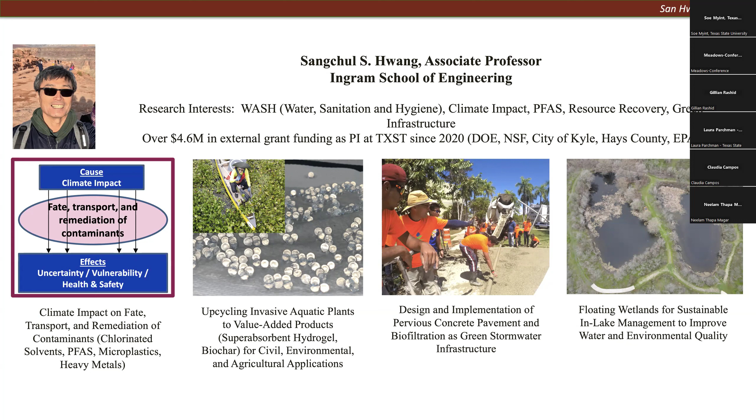So these four areas are actually my research thrust areas. One, I'm an environmental engineer, so I do a lot of fate and transport and remediation of contaminants, climate impacted, right? Because everything is uncertain, and community health and environmental health and safety are vulnerable, nothing we can guarantee these days. Again, especially I have interest in PFAS and micro nanoplastics, and those legacy contaminants, chlorinated solvents and heavy metals.

As I mentioned, I do a lot of upcycling of waste or unwanted material. In this case, upcycling invasive aquatic plants. You see a lot of water hyacinths in the San Marcos River, right? And then I process it to produce value-added products like superabsorbent hydrogel, or biochar. So I apply them for civil, environmental, and agricultural purposes.

And then the third one is actually today's topic, isn't it? Pervious concrete pavement and biofiltration as green stormwater infrastructure. And I actually train students and have them gain hands-on experience on these topics. You see here a lot of students here, right?

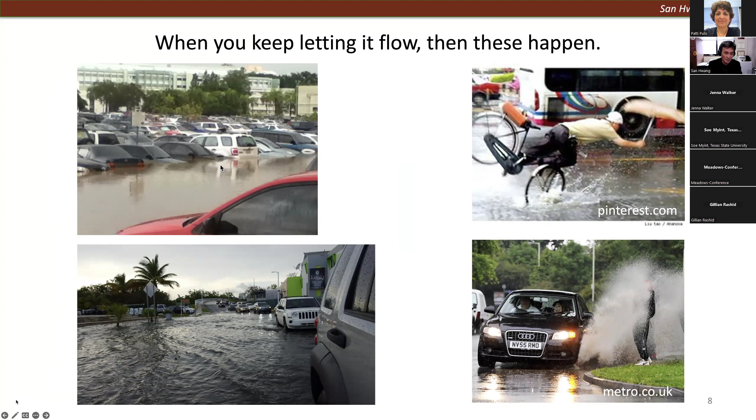So let it flow, let it flow, let it flow. If you keep doing it, this is gonna happen: flooding, flash flooding, right? This is actually a previous institution I worked in Puerto Rico, and the city, not only there, and in Texas, you guys think about, right? So we have Thanksgiving flooding in San Marcos 2015 as well.

So, well, talking about runoff coefficient C, okay? This ratio, meaning when rain is coming to that specific area, 75 or 85% is flushing off. That is runoff coefficient, right? This is impervious surface like ordinary concrete pavement or asphalt pavement.

Runoff coefficient is about 0.75, 0.85. Compared to that, if it is a pervious concrete system or a permeable concrete system, runoff coefficient C value is very, very low, if not zero. So with all that, we can reduce flooding in the downstream.

And I will show you one by one, but anyway, we can have a smaller downstream stormwater management. We can have a smaller retention or bioretention facility so that we can increase land utilization. With all that, we can reduce hydraulic force, isn't it?

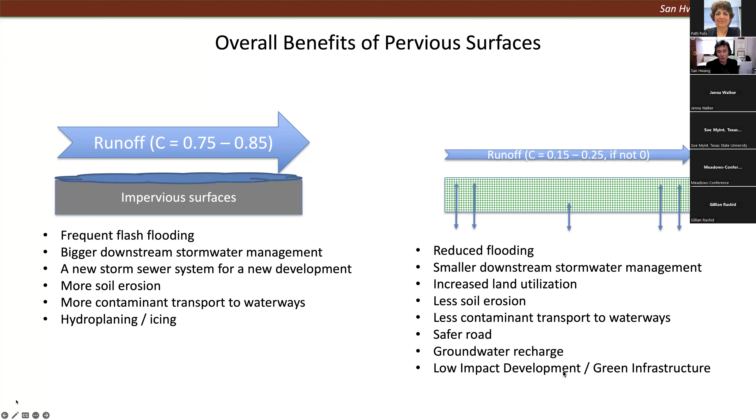So this pervious pavement is a low impact development tool and green infrastructure as well.

So now everybody is fully awake, right? So this is pervious concrete, and it is actually stormwater runoff control. It is a water conservation harvesting tool and smart land development and safer walkable pavement. And also it is reducing urban heat island effect. So I'm gonna explain just one by one from now on.

Next slide has also a video, so please be careful.

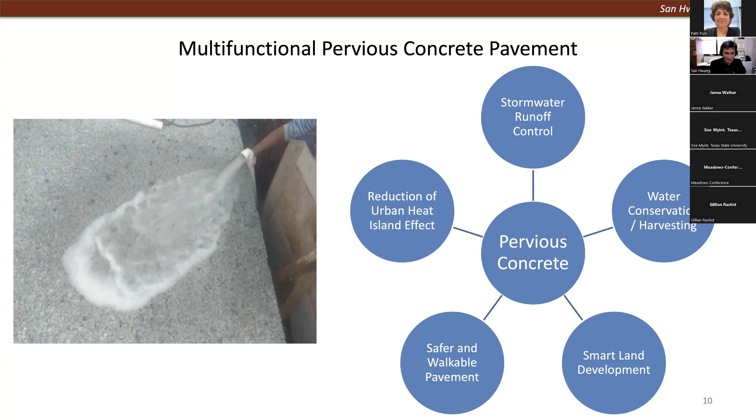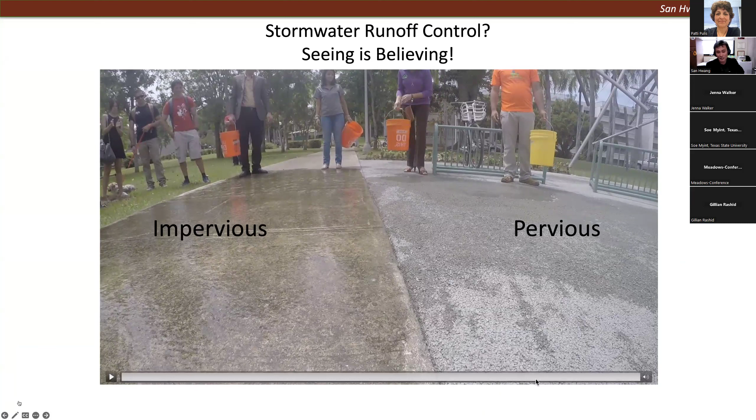Okay, so this is not so bad. This is just comparing impervious pavement and pervious pavement. Seeing is believing, so this is what I would like to talk about. If you have a pervious system, you have less runoff, and then downstream you have less impact. So it's low impact, isn't it?

The reason pervious pavement can catch and infiltrate water is because it has a void content, emptiness, simply speaking, about 20%-ish. Because of that emptiness, it is actually lighter. Long ago, around 1910, in England, when British guys made pervious concrete, they called it lightweight concrete because of the emptiness, its density is lighter compared to ordinary concrete.

Because of that 20% void content, we can expect the drainage rate about this much. This video is showing about 10 millimeters per second infiltration rate. Depending on discipline, it can be called drainage rate, infiltration rate, permeability, or something like that.

Because of this emptiness, compressive strength is a little bit weaker than ordinary concrete. In my lab and field application, I was able to make 20 megapascals, which is about 3,000 PSI. In order to be used as roadway pavement under typical traffic conditions, compressive strength should be greater than 3,000 PSI, preferably 4,000 PSI. So typical pervious concrete is not good for roadway pavement because its compressive strength is low.

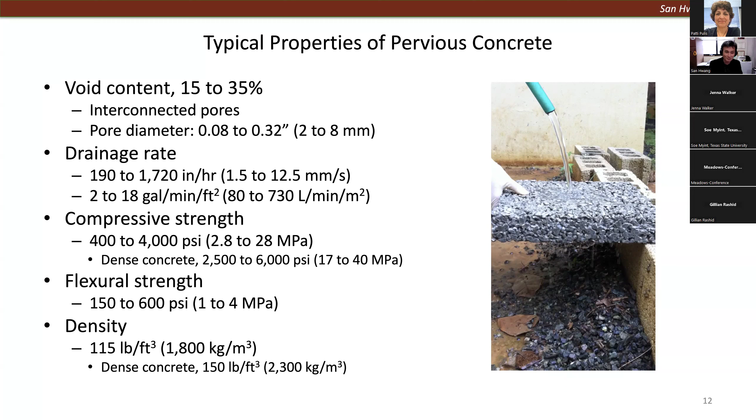So it's not suitable per se. Again, groundwater recharge is a big thing with pervious concrete. I think the next slide will show you.

Going back here, the runoff water is not clean. It may contain some contaminants or other materials in it. And this concrete system may not generate or infiltrate clean water.

However, in the lab, our team was able to find additional functions of pervious concrete, reducing phosphorus, reducing fecal coliform, and many other contaminants. In this experiment, we were also able to reduce pH to 8.5, because as you know, concrete is alkaline, so pH is normally high, which is no good for groundwater recharge.

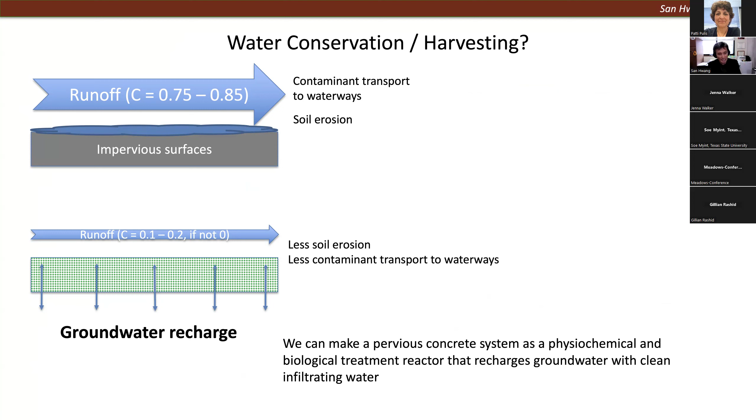However, there is a way to give our soil and groundwater good quality water through pervious concrete. So where there is a will, there is a way. I found the will, and now I'm showing you a way.

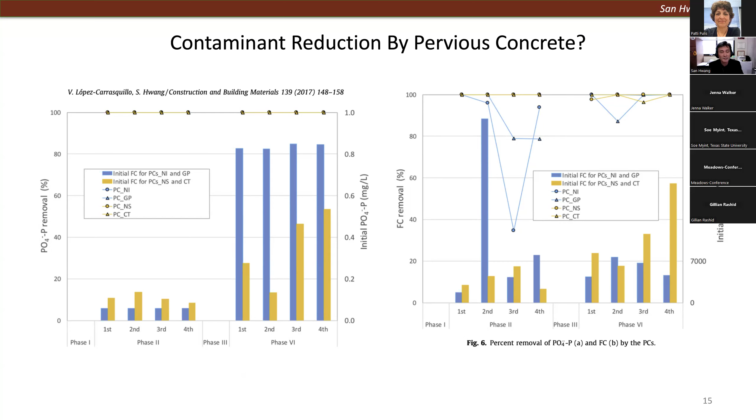The second topic is that we can go even smarter in terms of land development. If it's a typical impervious paver area, like a shopping mall, here in Texas, in Houston, we have a lot of unnecessary detention ponds. That's because we have a lot of runoff water going downstream, so we let it flow and then collect it. This is not smart.

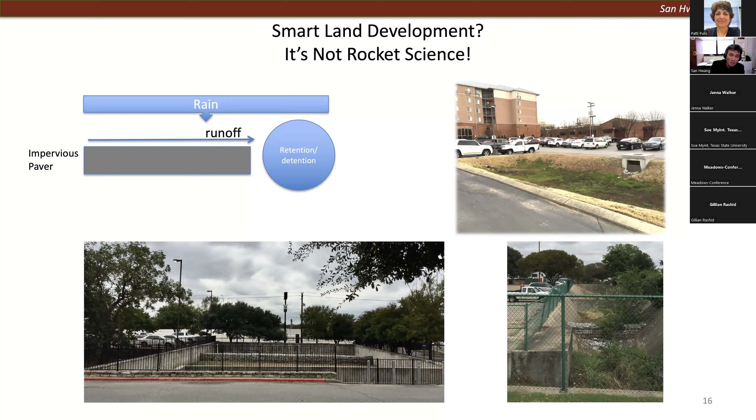However, a smarter approach is this one. We can have less water running off, so we can achieve savings by requiring less land for retention and detention areas. With all that, more land will be available for other purposes. Maybe you can have more parking, or you can purchase less land for development. This is not rocket science, everybody can understand it.

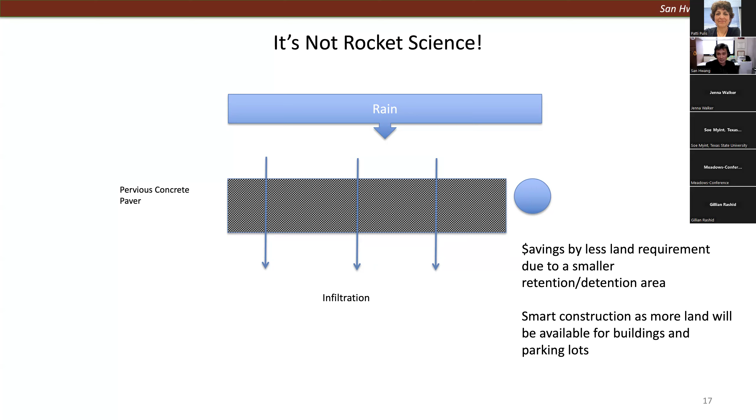The third point is that the pervious pavement system can provide a safer, ADA-compliant surface, and a drier surface as well.

This was basically to provide a better environment for the students in this case, and also to catch stormwater runoff in this specific area. About 3,000 square feet was the total area I worked on.

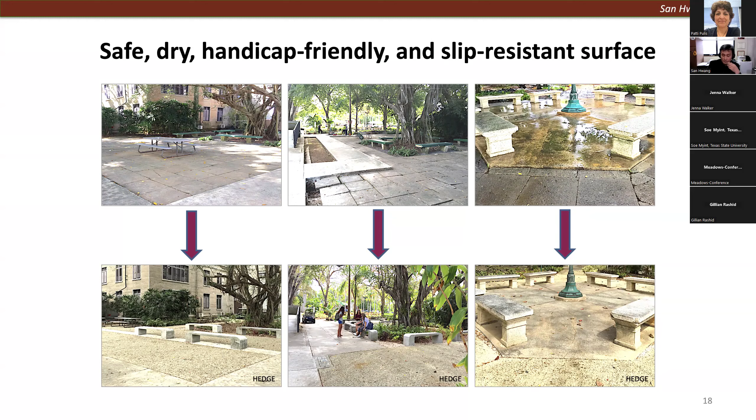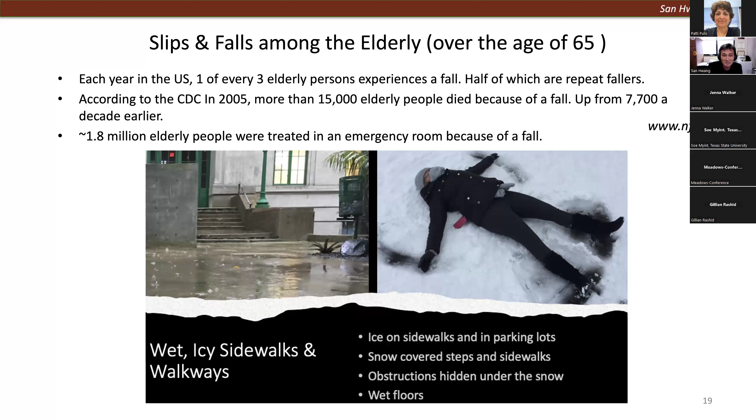Talking about urban heat island, because one benefit of having a pervious system is reduction of urban heat island. Downtown, with a lot of impervious area, temperature is about 90-some degrees, but with more permeable, pervious, or natural area, you get about 85 - so about 8 to 10 degree difference with a permeable system. A natural system is even better.

But if we cannot go with a natural system, we can mimic it - we can mimic a natural system. So nature-inspired engineering systems can be an alternative way.

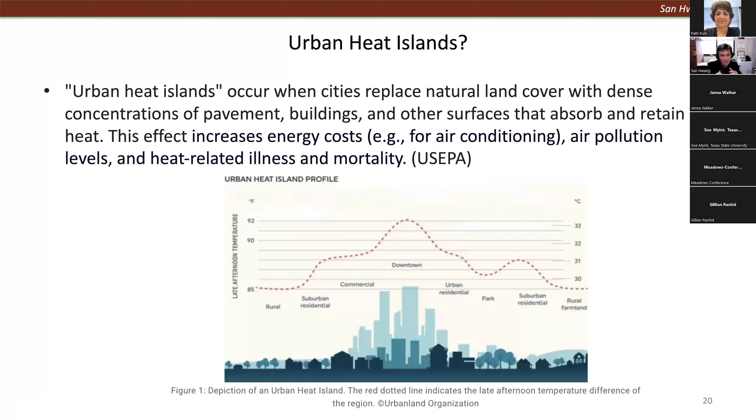Dove Springs has traditionally been a vulnerable community - low income, low education, and poor housing facilities. So the City of Austin put a lot of attention and investment into Dove Springs development. Now they have well-paved areas, new buildings, recreation buildings, etc. However, good as those things are, because of that typical traditional development, they now experience an urban heat island effect, with a feeling temperature about 10 degrees Fahrenheit hotter than the rest of Austin.

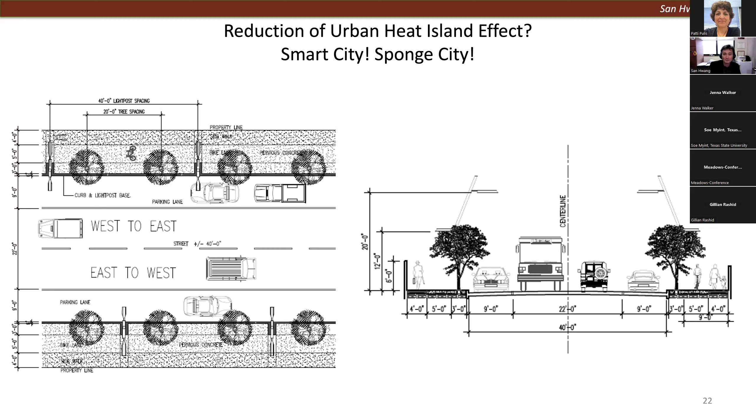Let me speed up here. Pervious concrete pavement can be made with three different design methods. First, no infiltration, meaning stormwater runoff is infiltrating through the slab, but no water goes down to the soil - that's the no infiltration design. So this is a slab, then a reservoir course, then an under-drain pipe connected to a nearby stormwater catchment.

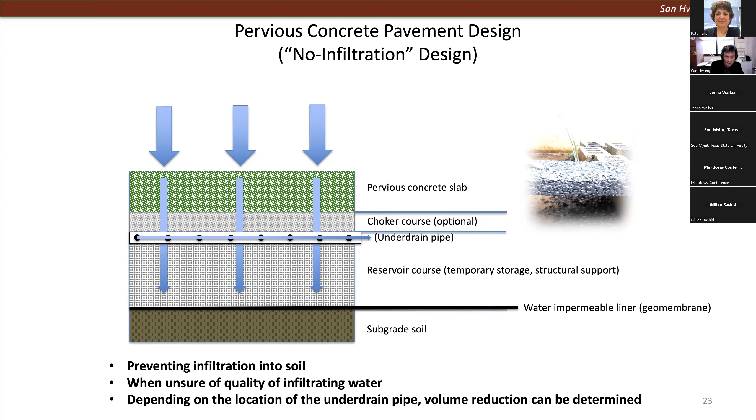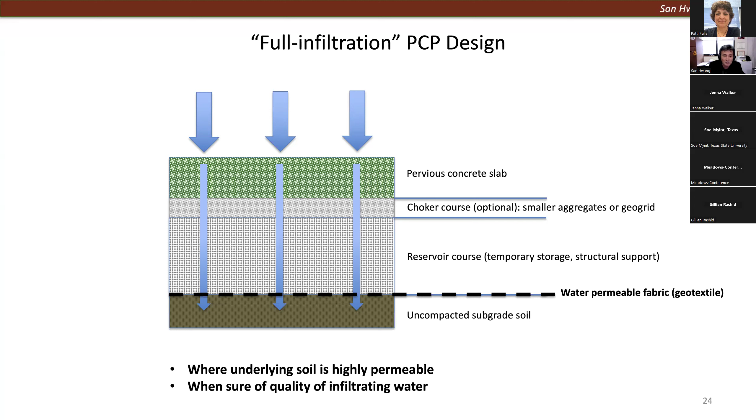Location can be different depending on the stored amount of water in the reservoir course. Another method is full infiltration, meaning all the infiltrated water is further infiltrated down to the soil - because of that, we don't have an under-drain perforated pipe. Typically we design a pervious concrete system with partial infiltration - some water goes all the way down to the soil and groundwater system, and some bypasses to a nearby stormwater drain through the under-drain pipe. Again, the under-drain pipe location can differ depending on how much water you want to hold in your system before releasing it downstream.

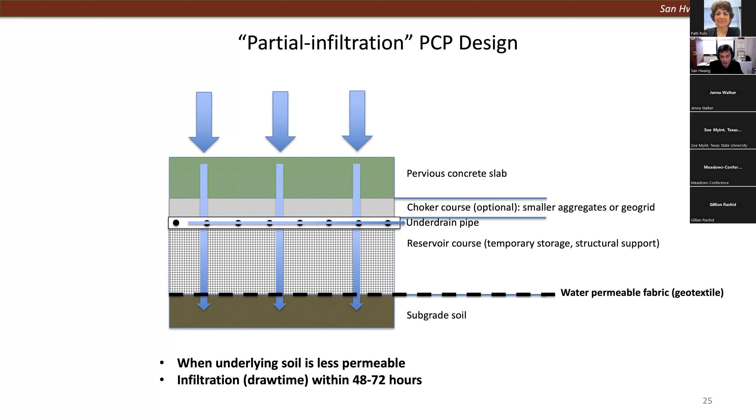Pervious concrete applications—structurally they are weak because of 15 to 30, 35% void content. Typically parking stalls are the favorite application here.

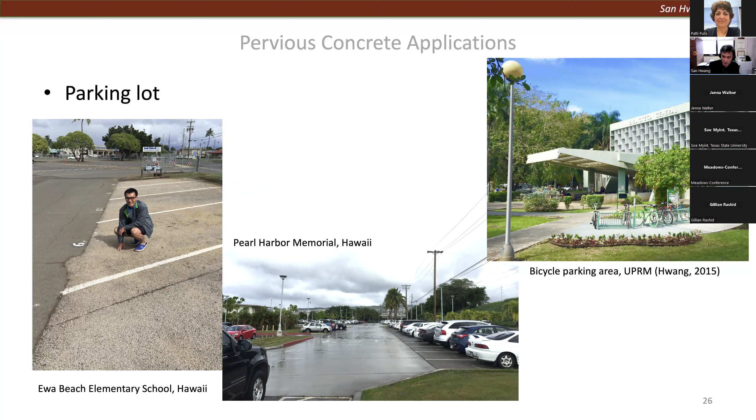I'm not sure if you went to Pearl Harbor Memorial in Hawaii, but this big parking area has stalls made of pervious concrete. And this is a bicycle parking lot area I created with pervious concrete right in front of the General Library. Another application is a trail or sidewalk.

And public plaza can be renovated with pervious concrete. Left is mine, and the right side is 2008, I believe—yes, 2008, when China opened the Summer Olympics in Beijing. They had about 2.7 million square feet of pervious concrete there.

You see a lot of different colors here. This is actually olive branch color too. Depending on location, you can mingle the color of pervious concrete with the surroundings. In this case, we have a very old building looking like olive branch color, that's why I used olive branch color here. Anyway, it can be colored.

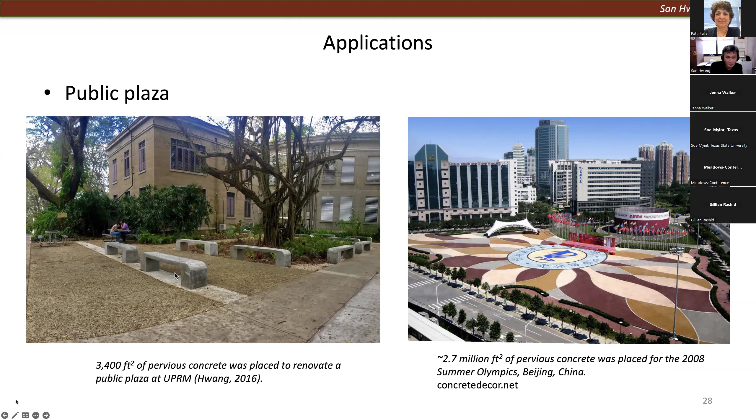Construction can be done with experienced constructors or installers. With all that, price is a little bit higher than ordinary concrete construction. Typically, we need about 15 people dealing with the roller screed, the raking, and so on.

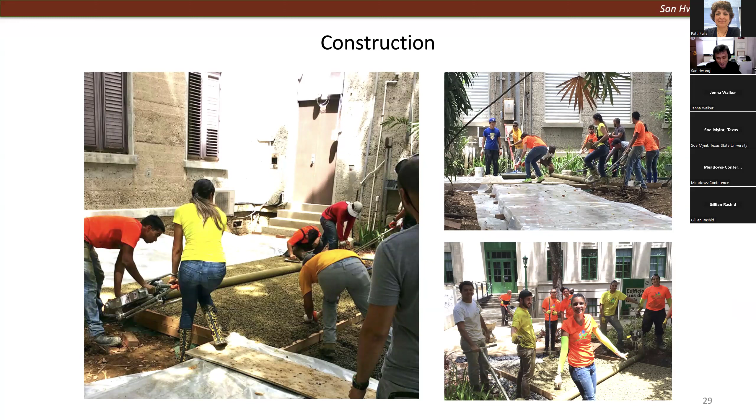This is a photo of pervious concrete construction I gave to my students for their public service and service learning project. That's what I wanted to say.

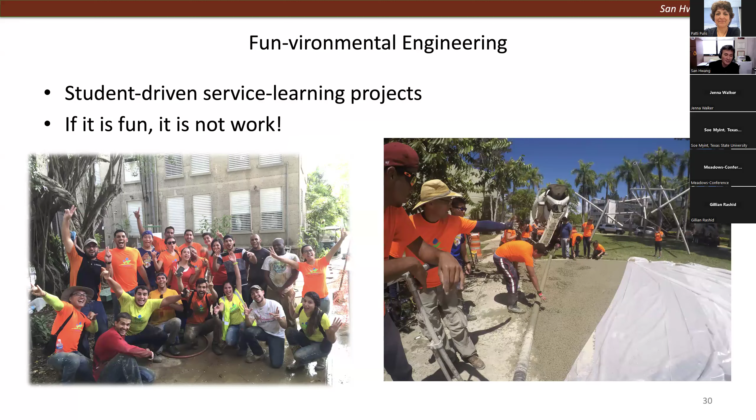Just wanted to brag about it, right? So fun-vironmental engineering is my motto, my work motto. If it is fun, it's not work, although we get dirty. So it's all about fun—fun for us and a benefit for the environment.

So you may ask me, how do we make pervious concrete? Typically it is a 1:4 ratio—1 cement, 4 aggregate—and water content is about 30% of the cement amount. This is kind of a grandfather's mixed proportion: 1 cement and 4 coarse aggregate, plus a little bit of water.

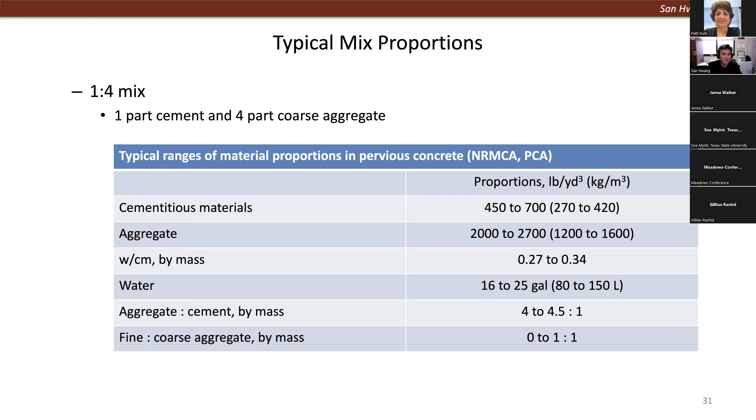There is a scientific way to determine the optimum mix proportions, but I don't think it's a good idea to introduce that in this webinar. As you know, nothing is perfect—there is always a clogging issue.

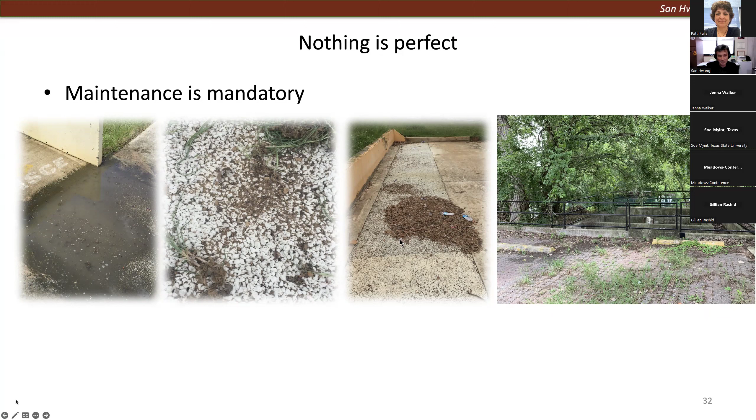This is actually San Marcos here—this is Spring Lake, and this is a permeable pavement on the side, behind Kirby restaurant. If the location, design, construction, or maintenance are no good, you will have clogging. So as I mentioned, factors for a long-lived pervious concrete pavement are: design should be perfect, construction should be perfect, selection of location should be perfect, and maintenance should be good enough.

This slide shows a good example of bad location selection. In this area, the pervious concrete I placed—all the water is going to here, accumulating, and then it clogs. It just looks ugly. So again, this is a good example of bad location selection. I did it on purpose to show how important location selection is.

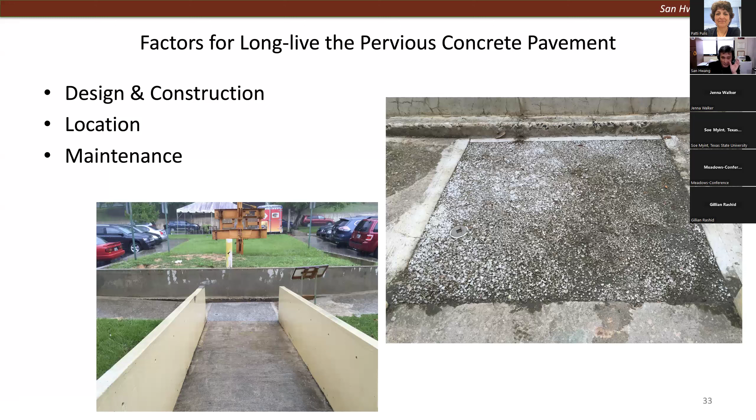Maybe the third most important factor, if not the most, is providing good maintenance. You may ask how we can provide maintenance. Well, simple blowing is good enough for routine maintenance. Vacuum sweeping is good too.

How do we do vacuum sweeping if we don't have a street cleaner or big sized equipment? Well, you can improvise—use a lawnmower, lay it down on the ground, and you can do sweeping as well. Be smart. And for periodic maintenance, you can apply pressure washing as well.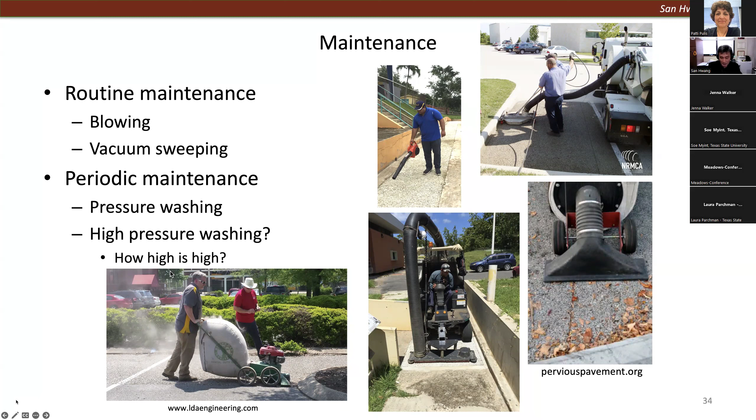Pressure washing in combination with vacuum—how high? A typical pressure washer you keep in your garage is 2,500 PSI or 3,000 PSI. Just keep it about 2 feet off the ground at a 45 to 60-degree angle. About 2 feet off is good enough.

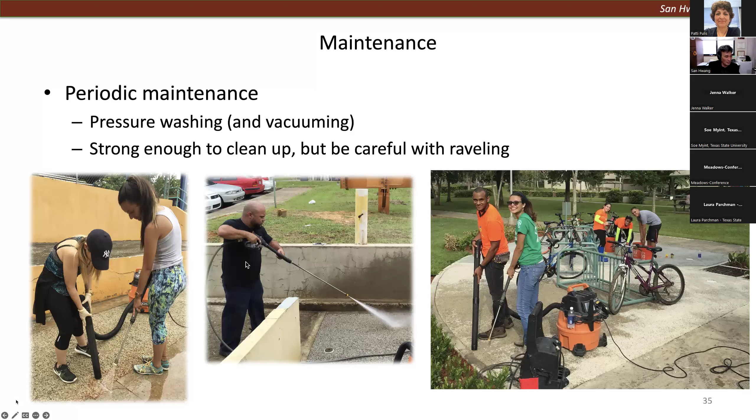If it's too close, you can make every gravel fly away—raveling away. So don't do that. If it's a small area, yes, you can do that, but what if it's a big area?

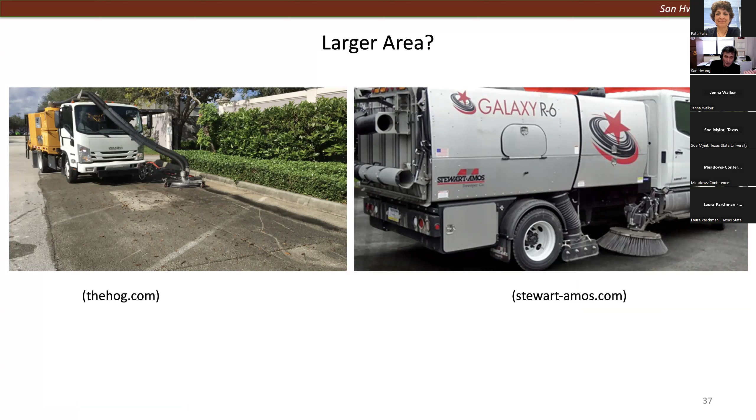For a big area, we have specialized heavy equipment like cleaners that clean the pervious system as well. Now, if it's too clogged and regular vacuuming can't work, then you can apply some chemicals as well. There are commercial chemicals specifically designed for pervious concrete cleaning.

However, I don't recommend the use of chemicals, because chemicals are chemicals—there is no green chemicals in my world. So do more frequent, routine, and regular maintenance instead of waiting until it's time for deep cleaning with chemicals.

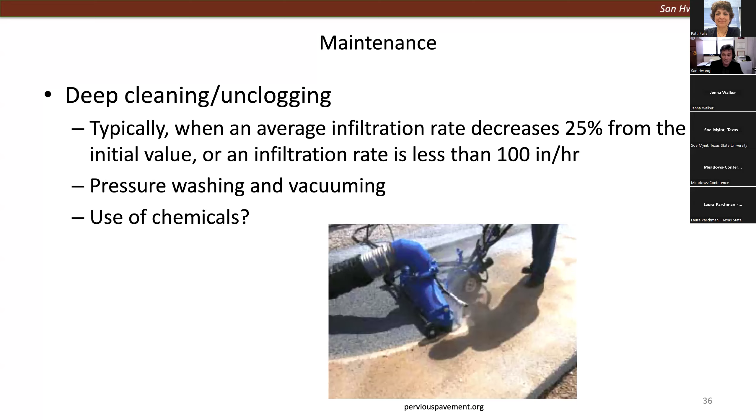As I mentioned before, permeable pavement is slightly more expensive than ordinary concrete, assuming a 6-inch thick slab. Material cost is about $10 per square foot, and after installation the price is doubled due to labor and installation charges. So about $15 to $16 is what they are asking for a 6-inch slab, which is a bit more expensive than ordinary concrete.

However, thinking about environmental sustainability benefits, that cannot be counted in dollar units, right? We can reduce flooding and soil erosion, and we can enhance groundwater recharge, and so on. So actually, the life cycle cost is much lower than ordinary pavement.

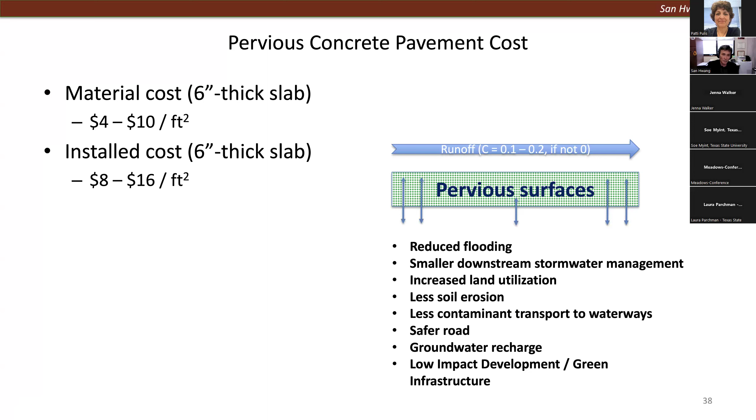I found this permeable pavement cost data from another resource. As you see here, there are different types of permeable pavement: permeable paver, pervious concrete, and porous asphalt. You may ask, what is a permeable paver? Permeable pavers are those interlocking pavers you can see right in front of this Ingram School of Engineering, and on the other side near the curvy restaurant area. Pervious concrete is what we have on Sessom Drive section on campus, and then obviously porous asphalt.

So depending on the permeable pavement, the cost per square foot varies. For pervious concrete, it is around $8 to $16, which is the same as what I said here.

Assuming you would like to have a 2-car pervious concrete driveway, the cost will be around $9,000 - wow, that's expensive. If you just put regular ordinary concrete, it's going to be about $4,000 to $5,000.

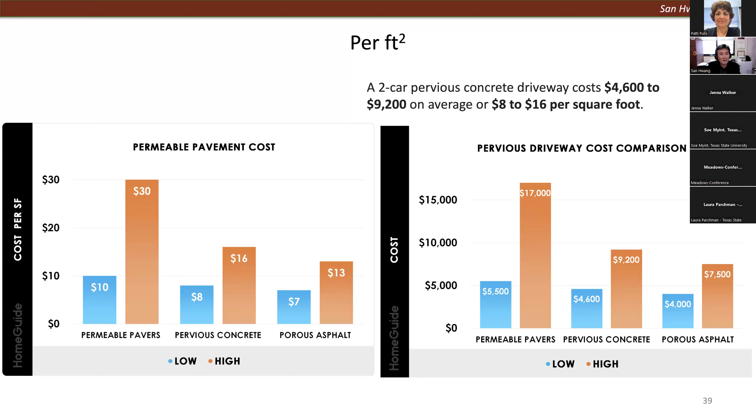Well, I should say what I say here. Anyway, there is a greener, smarter way to go - more low impact development and more green stormwater infrastructure. I believe this is my last slide.